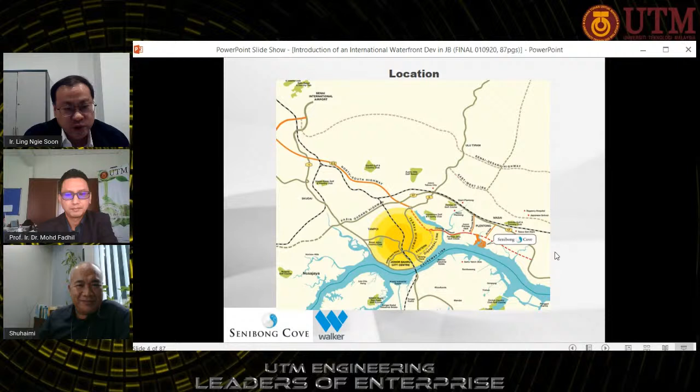So look at this map. As I mentioned, the location is just opposite Sembawang. It's not that far, it's in Johor Bahru. So if our audience has the opportunity, you can always drive here and have a look.

I will show the before and after of this project. We have gone through a lot of hassle, because when we started, the biggest challenge was the water quality. We started in 2008, 2009, when the site consisted of fish ponds, so we carried out infill for all the fish ponds. Reclamation was on the outer part.

We took almost 5 to 6 years to get all the land reclaimed and ready. You can see this project is very unique compared with some developments that are very squarish or rectangular - the piece of land is actually very curved. The land is separated by the river, called Sungai Lunchoo. I think the history actually started from this Sungai Lunchoo.

Because it's a waterfront development, we have carried out a lot of soil investigation. This is one of the trial runs we carried out in order to compact the land properly. So instead of using vertical drains, based on this trial run, we decided to use a surcharge of preloading.

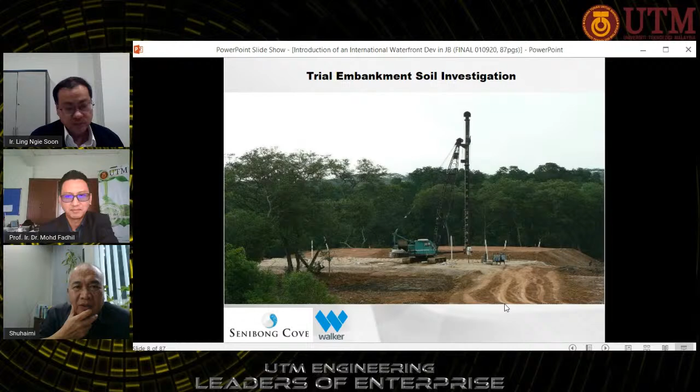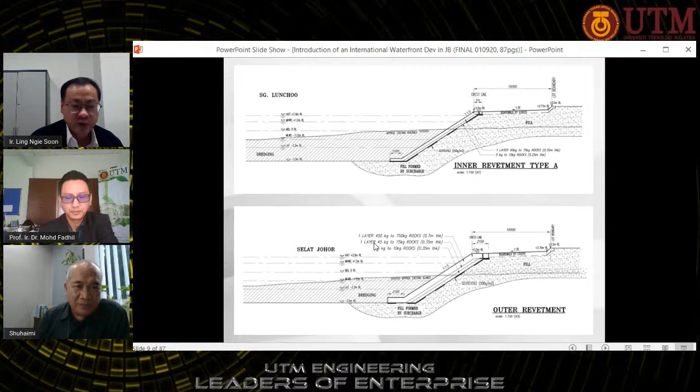Revetment walls have been introduced because it's a waterfront, a coastal line, so you have to protect all the edges of the land. For the inner part, we introduced a 2-layer revetment wall, and facing the Strait of Johor, a 3-layer revetment wall. Next.

Look at this plan. You can see the blue color is a channel we have dredged to -6 meters, 5.5 to 6 meters, and the bigger portion is a marina. That is our marina, so this project is not only normal houses or a park. We have a marina over there. Later we'll show some photos.

Actually, this marina has been fully occupied by local and foreign boats.

The river of Sungai Lunchoo has been dredged also. We have filled up to plus 3.2 meters. So for this island, you can see some of the inside of the island.

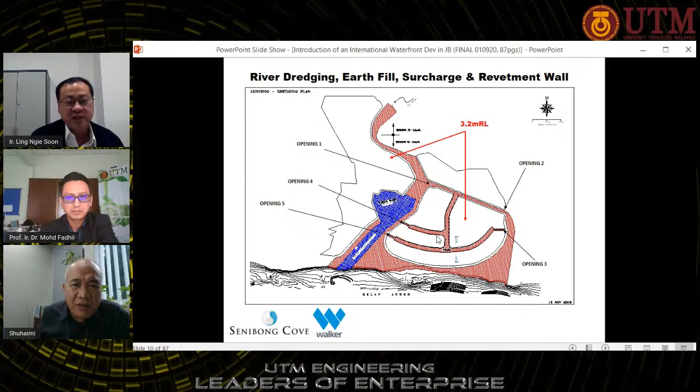We realigned the fish pond, so we made this island. We have a canal inside the island, and based on the water tide, high tide and low tide, the water in the canal is refreshed or recycled every 14 days. Maybe later we can touch a bit more on this aspect. Next.

In terms of all this reclamation, the earthwork, revetment wall, the trial bund for soil compaction, even the canal flushing, all this has been covered in an IEM journal.

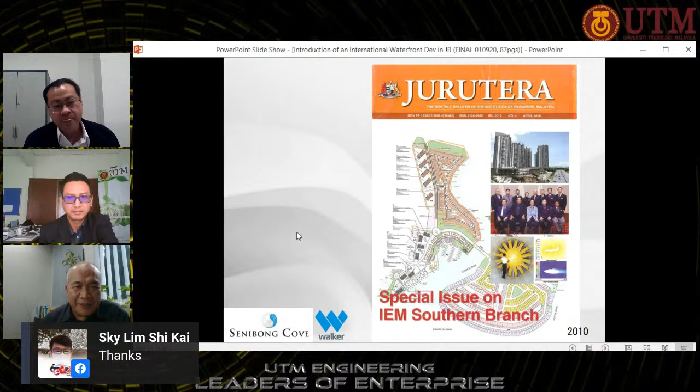Okay, this is back to...

2010 to 2013. During that time, we were lucky because the catchment for this river is not that big, only 7.5 kilometers square, compared with some rivers like Sungai Skudai or Sungai Tebrau which have quarries and factories, so it's a bit difficult to manage. For this river, I think a lot of hard work has been put in.

Next, in order to manage this river, we engaged with the local authority, working with IRDA, DOE, local council MBJB, DID, and most of the authorities, to assist us especially upstream, because we know they have a lot of proposals.

Why not do sub-filtration, this or that? But we know that without minimizing the upstream pollution, downstream filtration alone doesn't solve the problem from the source.

So we worked closely with the local authority, and the engagement with the few factories upstream took quite some time also. The factories had no choice; they had to upgrade their treatment plants. One factory didn't have a proper license, so they had to close down, and all these things. Next.

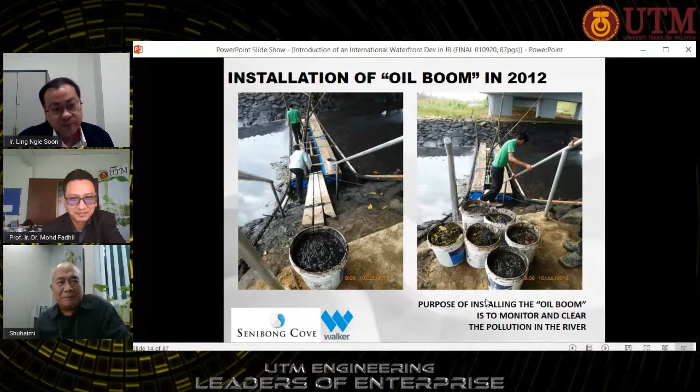We also applied some mud balls upstream. On still water, this actually works quite well, but if you have a current, most of the time it may not work so well.

Yes, this involves microorganisms. This one we worked together with the Orang Asli community, which is not far away from us. This is part of our CSR, our project.

So you're working together with the community of Orang Asli around that area? Yeah, we have 24 families nearby. There's a small river called Sungai Senyum where they are staying.

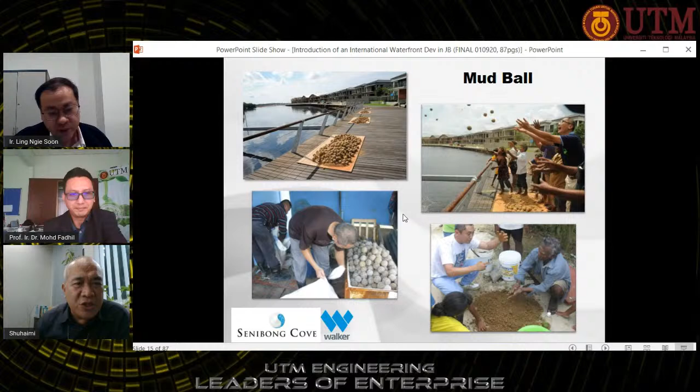We have dredged the river. Normally, civil engineers, reclamation or marine consultants will recommend a cutter suction system to scour the riverbed or seabed. But in this case, we put the excavator on the barge. It's a very traditional way, and we excavate the river very carefully.

Because we know this project needs to be sustainable, we cannot disturb the marine life. If you remove it, you won't see the birds and other fauna and flora.

We have data on the mangrove area for that site before that. Once the project came in, we found that the contamination problem is not from this activity itself, it's actually from industry. So that's why we came in to try to help.

I see, okay. Sorry, please continue with the engineering. I thought I should do the invitation for Professor Fadhil. It's okay, you can continue. Okay, next slide.

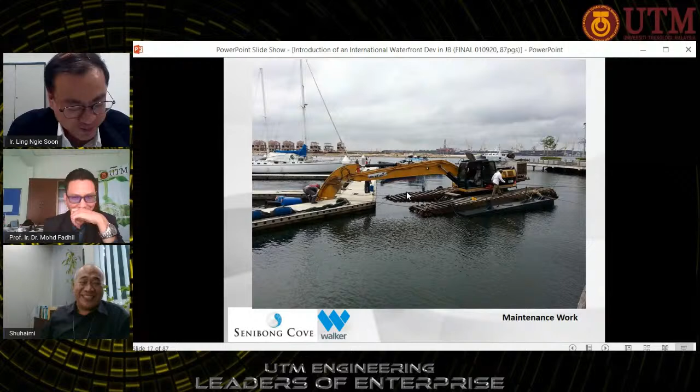Next, we also have a swamp which we have managed to preserve. We liaised with our original landowner, KPRJ, and applied to the government to preserve this swamp because we believe it's important so that all the marine and natural life can be preserved at this location. On one hand we are into the commercial aspect for development, on the other hand we are looking into the environment and nature, which needs to be preserved and sustainable.

Okay, next. I think now it's on the UTM side. As I said, this goes back to 2008 when we started. I think now it's Prof Fadhil's turn. Please, Prof Fadhil.

Thank you very much, Engineer Ling, and thank you Prof Shuhaimi for this very interesting sharing. This is what we call collaboration in reality, because once we started with engineering almost 10 years ago, the engagement began with mutual understanding, particularly on pollution. So when we came to Senibong, that time it was under the Front Concept Sdn Bhd.

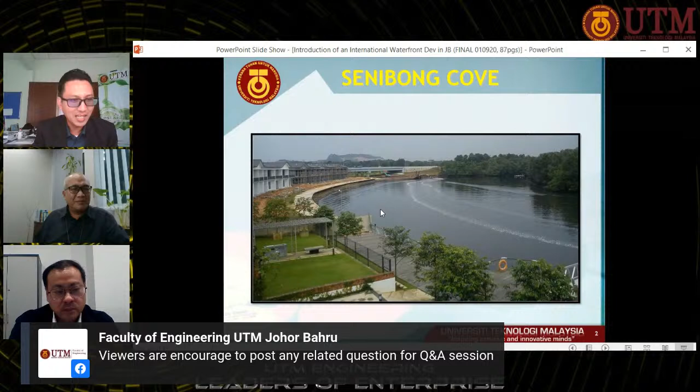So I believe that everybody watching this session will find it interesting to know Mr. Ling is a good partner, a good collaborator. I think his idea, his motivation, is different from other people out there, because other people only think about the ROI, profit, profit, profit. But he's thinking about bringing academics, bringing private entity, bringing the authority to be part of this, because I think he loves the environment. He loved that - I'm not so sure why, maybe Sarawakian, something like that.

Maybe I believe so, because they are more natural on those things. So I do believe that.

Since then we've had some collaborations towards that, and this is our research. As I mentioned earlier, our discussion doesn't only stop at Senibong. Sometimes we move to Ion, which was just constructed and completed at that time. So Mr. Ling asked us, can we have lunch over at Ion? And after Senibong got its own restaurant, he said why don't we have this kind of lunch over there instead.

But over lunch, he always throws out ideas. He always thinks beyond what he originally imagined for Senibong. That's why it became something like a terrible challenge for us, especially as academicians doing brainstorming sessions. Always a brainstorming challenge, right? We actually try to make sure we create some significant impact for others.

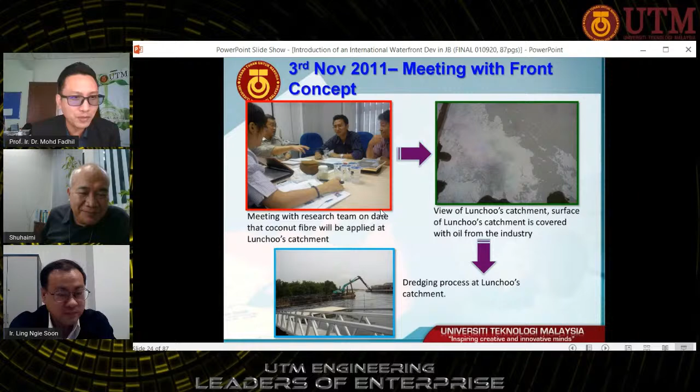Yeah, because we are academicians, we need the data. With the data, then we can try to predict and give some kind of advice for technical purposes. So during that time we tried many kinds of research elements, and Prof Kenzo showed us a very simple method — we did sampling, what we call grab sampling, and tried to investigate exactly what the matters were, the organic matters there.

Even Mr. Ling's team was wondering, because you could see that kind of abundance of oil boom on top, right? But to be honest, the species could still survive there. They said the fish and some other items were still alive, could survive, and they actually received some feedback from the orang asli as well. The orang asli there are the Seletar, orang asal Seletar. During that time they said, 'oh, we don't have any problem,' but that gave us a real headache — how to solve this kind of thing.

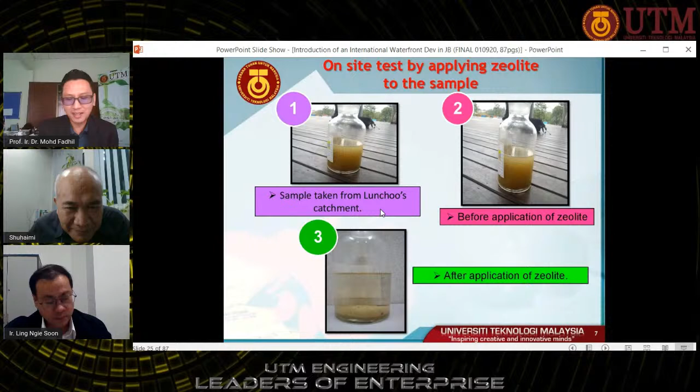Because this is temporary, not a permanent pollution solution, since it's coming from the industry side. So we tried a kind of zeolite potential approach, and it was actually tested. Yes, I can see this is good for this kind of murky material, especially from the water. And we tried to investigate and do further analysis.

Further on, we did some, we call it CSR — not exactly CSR, but volunteer work from us, because Mr. Ling already volunteered many things. He shared with us the data, the facilities, and also the spaces there. And UTM also shared something. So we did some kind of checking on the water quality, and we still found that the water quality was good.

In terms of physical parameters, the DO level, the temperature, the salinity, it was actually natural, or as we call it, the existing condition as before they came for the construction there. And then this made us try to do further investigation, especially on how to clean, because we know that once six months pass, if we cannot remove this kind of oily contamination and those kinds of pollutants...

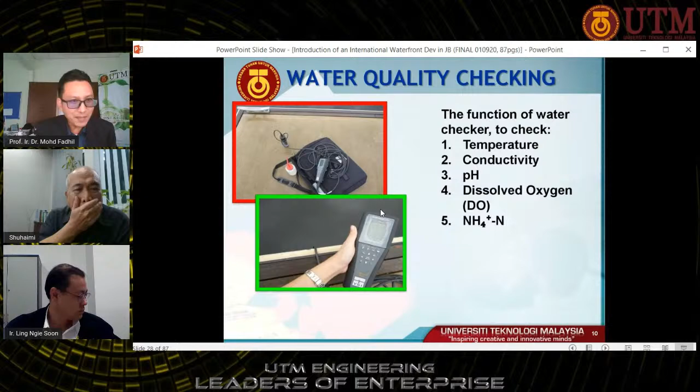Residue from the factory will be in the sediments in the swampy area. The sediment is actually very important for us to study.

That's why we do a kind of laboratory test, investigation, and monitoring for Mr. Ling, and the team of Mr. Ling also asked us what exactly our findings, what exactly our result was over there.

So without funding, we still can do a kind of engagement. Mr. Ling said to me, please Dr. Fadhil, write any kind of cost, we can pay, something like that. He wanted to do that first. But I said to Mr. Ling, this time is not about the cost. This time is about knowledge first.

We are actually very concerned about what happens there because we need to stop the pollution first. I said to Mr. Ling it's unfair for you to pay us because someone else actually did that, it's not from you. So no proposal ever came from me, from my team. I never put a bill to him. I said my contribution is only to the lunch, only lunch.

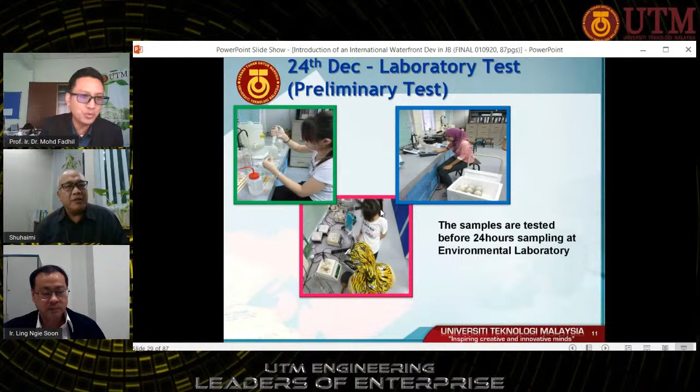So we are doing that thing. I want to motivate people out there, academicians, that cost or money is not everything, because you have to do a kind of genuine research first. Otherwise you may have a very wrong or different view or different research element you introduce to our partner. That's the reason why we are doing that one.

We started with what we call a concept with vulcanized coconut fiber. I think Mr. Ling, you still remember that time. We published 2 papers from these things, and we tried this method at our UTM Skudai River.

At UTM Skudai River we already tested the material, and I think Mr. Ling you still remember my student. She's now working as one of the researchers in a private college there, and she still continues this kind of development.

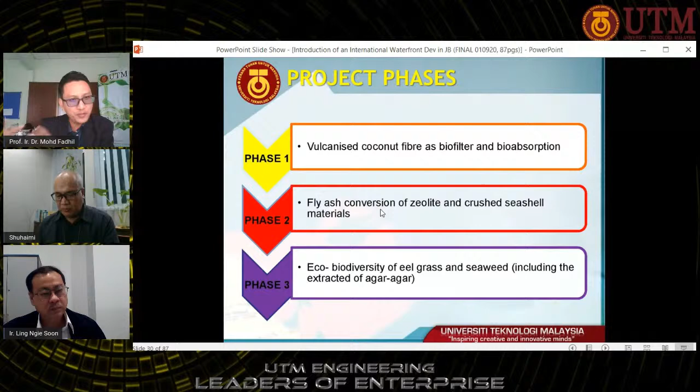So good, what we try to do and promote is not only as a research element but also other value. This is the application and kind of fiber - the first is palm oil fiber, and another one is coconut fiber. We found this is very interesting - coconut fiber is actually the best compared to the palm fiber in terms of absorption.

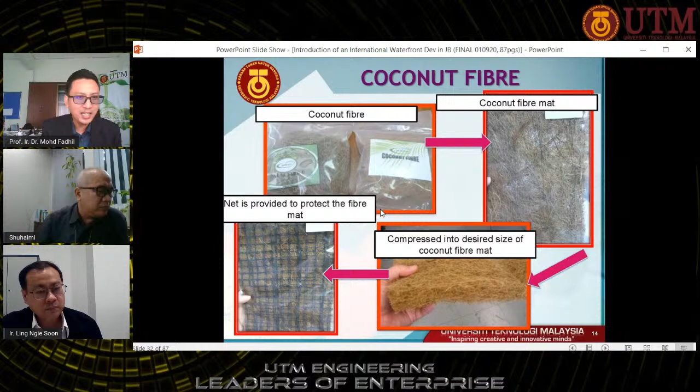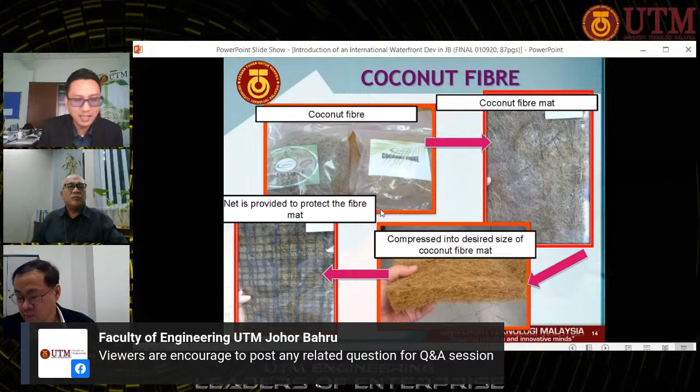We also made another proposal to Mr. Ling: if you want to use this material as your landscape material, because it already absorbs nutrients and pollutants, you can use that as what we call a setback for your landscape. So I think no problem if you want to continue later on with this. We already shared the result with Mr. Ling.

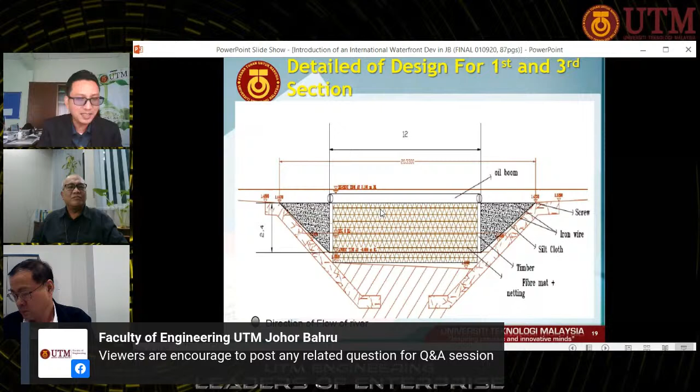Then we discussed further and developed more towards engineering purposes. We are working on some kind of rough idea, focusing on the base design for this kind of fabrication, the specific dimensions, and how many kilograms we need to develop for that.

This is actually to promote to their canal. Because when we listened to Mr. Ling, he said he developed a canal because they want to attract their residents to use that canal back, and also to appreciate the beauty of the canal. So in order to protect the canal, we are introducing this coconut fiber as one of the options if they want it in future. It means we already have some kind of investment for this one, so they can introduce it.

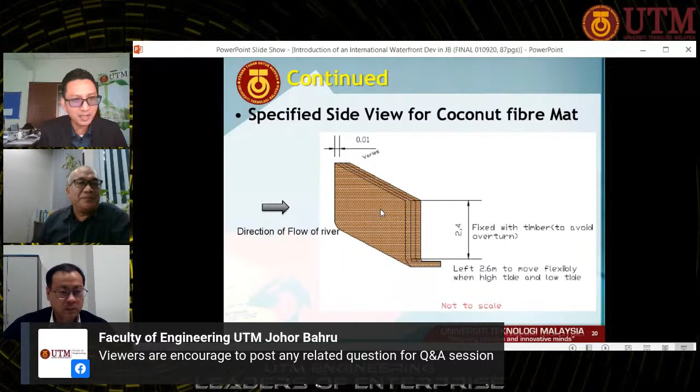But I said to Mr. Ling, please wait until we have treated our pollution well, because the pollution is not coming from you but from someone else, from a factory around.

Prof. Fadhil, just looking at your project, it did require some funding investment to run your experiment. So how do you actually handle that? Because you want things to happen first, but somehow there's a constraint of financial resources.

How do you actually take that as a challenge, and how do you move forward? This slide will be answering your remarks and how we can manage to do this.

Mr. Ling actually felt guilty because he used every single material and information from UTM, but none came from him. But I said no problem, because this is the genuine research we want to develop, and to create trust. I think Mr. Ling believes in long-term partnership rather than short-term, because this is for the future. Everybody can chip in, everybody can contribute to these things.

So for that kind of reason, Prof. Shuhaimi, after we engaged with him, we did a kind of lab testing, and then we had pre-results. So I said to Mr. Ling, can we move to the next phase? The next phase is we are asking for the knowledge transfer project.

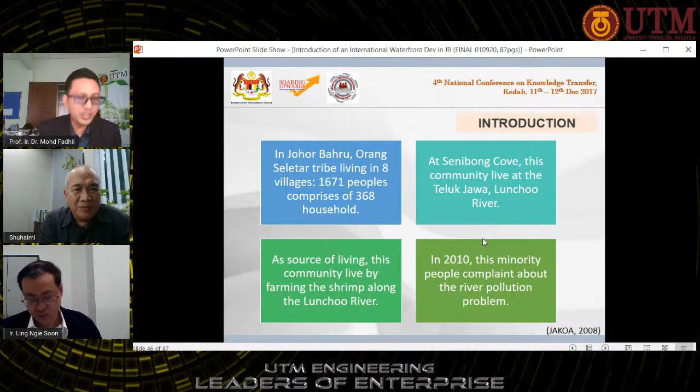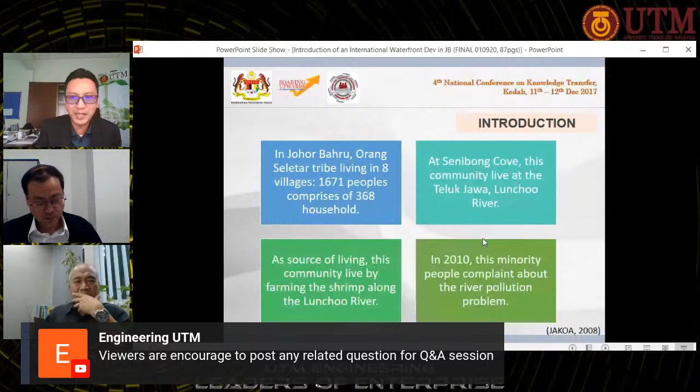What we need to do is protect it from outside influences, from the factory, as well as promote it more. Because of that, we have many kinds of projects, and we also include JAKOA. During that time, JAKOA also noticed this was one of the big projects, and they were very interested to know further about the collaboration, especially with JAKOA. We also have partners - this is part of the partners we already collaborated with.

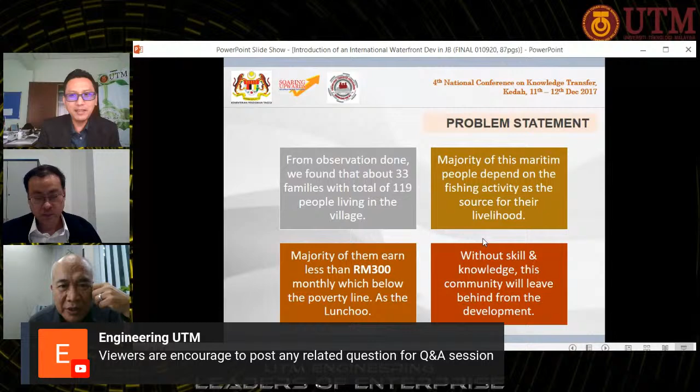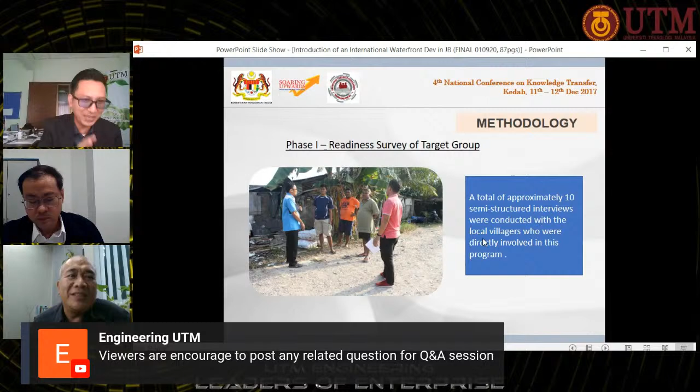I'll just skip all the KTP progress for 2017. This is the survey we did with the Orang Asal Seletar, and they are very happy. I'm not so sure what Mr. Ling did with them, but they are happy - happy that when the construction is there, they can still have some activities there, it doesn't disturb them.

So even the activity may improve their daily life probably, and that's why the main reason they are happy, I think. One reason is because they are doing the dredging side very well, so the sediments no longer interfere with the water contamination.

As our team shared with Mr. Ling, if the sediment is good, everything will be good. This area is very fascinating but also very challenging for us, because the tidal effect is very huge. You cannot discharge everything to the Strait of Johor, because in a few hours it will come back to you. The engineers from Senibong Cove will explain this later because the level is very huge.

I'm very happy this is the first cost from Senibong Cove - they already funded us for this seaweed platform. Mr. Ling asked me what happened to the seaweed. This is one of the reasons we brought a new team on biodiversity, because last time the seaweed was very good value for the fishes and biodiversity there. But when we introduced the system, the seaweed disappeared - it attracted other fishes that ate it. So we wanted to introduce something more resistant that's also good for biodiversity. Senibong contributed funding for this platform, and it still exists today.

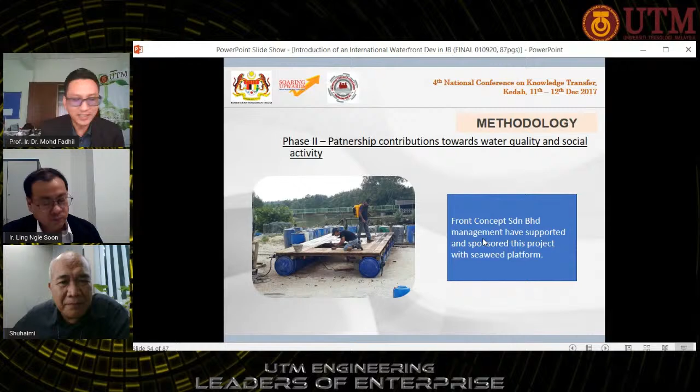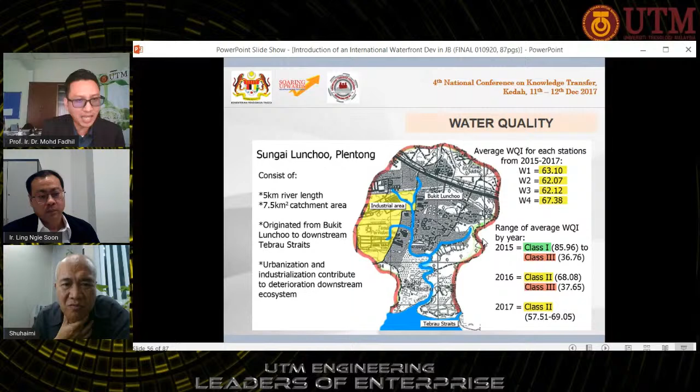Finally, this is the water quality - I'll just skip through it. Actually water quality here is somewhere around class 3, but once the project comes, the factory discharge is class 4 and class 5. So for the future, we're not only thinking class 3 but thinking class 2. This is what we are discussing and how to develop together.

There are some outcomes and impacts, but I don't want to continue - if you have questions, you can ask. What about fisheries? Is there any improvement or increase in fisheries activities? Yes, that's what we're thinking for future planning, so fisheries studies must be done.

We are very lucky because we have colleagues from FBME in UTM who are willing to contribute and introduce biodiversity as well as help keep the water clean. Mr. Ling is very happy - he said every time we come to Senibong, we introduce new things. Now it's about the new generation, young and very motivated, so they want to do something else.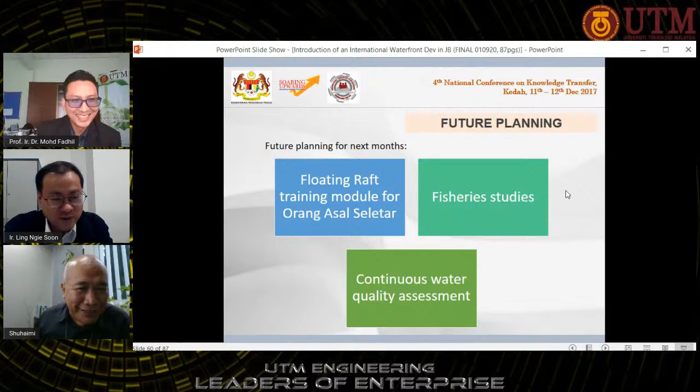The reason I asked this is because we did a dry run of this last month. During that presentation, the engineer showed us a photo of a person catching a fish from behind their house. I can share the photo later - yeah, that's our resident, a good one of our residents.

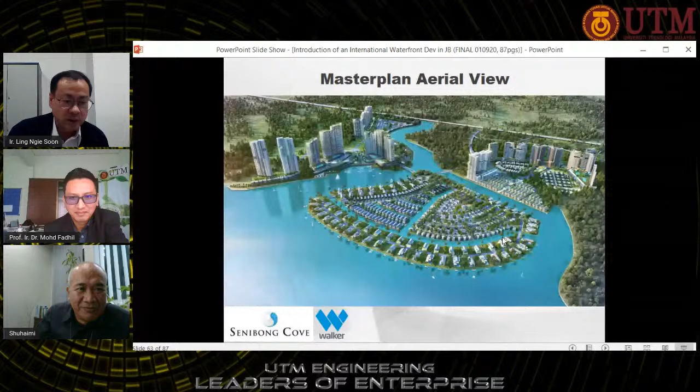If those haven't been to Senibong Cove, maybe I'll do some introduction. This is our main entrance. So when you enter, you see this is what we call the green boulevard. Beside the water, we have planted a lot of trees, especially rain trees, as a canopy.

This is the park next to when you enter Senibong, next to the highway. Normally for a lot of developers, they will fully make use of this pocket of land. It's quite big, around 5 acres. It's fronted to the highway of the main road. If you're from KL, you'll see they would make it a mixed development - shopping mall, hotel, office tower. But actually, we make it a park. So we don't look into the ROI on this aspect.

The park actually introduces a water pond. This water inside the pond is from the river. So high tide water flows in, and we also introduce an aerator. We use that pond also for water quality monitoring, so we take samples from there.

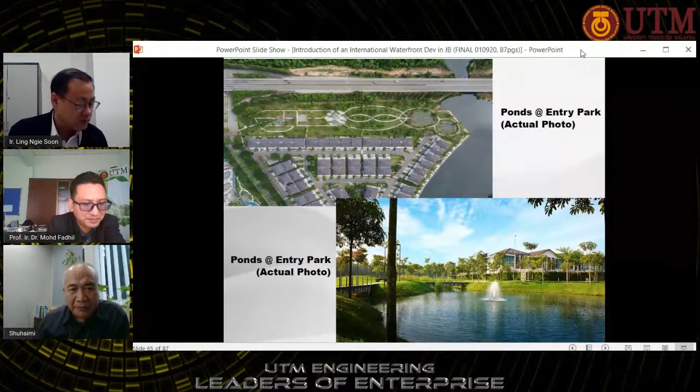There is another park I think is quite unique, which I want to share. Originally, this park had one main drain cutting through it. Normally for houses facing the main drain, a lot of buyers try to avoid houses facing the main drain.

But when you have a crisis, there is always an opportunity. So this main drain, we connected it with the park. We introduced a pond, so it became a water feature. When the high water flows in, we introduce a weir, that is how we retain the water. So the houses, instead of facing the main drain, actually become alive.

Mr. Ling, this is the original photo, right? This is the original photo. I think on the top is our original planning.

Yeah, next. Engineer, do you plan to show some video, things like that? Because I think we're almost about... okay, maybe just finish off the slide. Yeah, I think not that many.

Okay, this is the marina, and then the marina temporarily has a restaurant, seafood restaurant over there. So Professor Suhaimi, when you're here, we can buy you seafood here. But the seafood is not from the Sungai Lunchu, no worry.

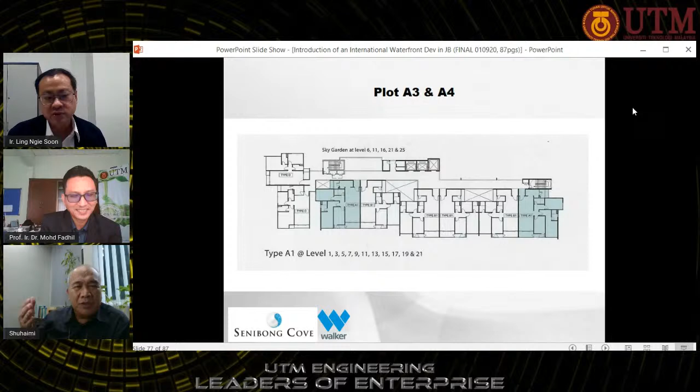You see, this is the apartment layout design. There is single loading, a lot of cross ventilation and lighting. So there's not only the water, swamp, green, all these things, but also lighting - the ESD side.

There are a few more slides. I think this is some of our latest projects. This is Senibong Hills, which is quite unique - I think this could probably be the first in Johor. Instead of putting the park next to the house, we put a park inside the house, creating a void which you can turn into an inner park. You can have your own privacy and also have activities inside the park.

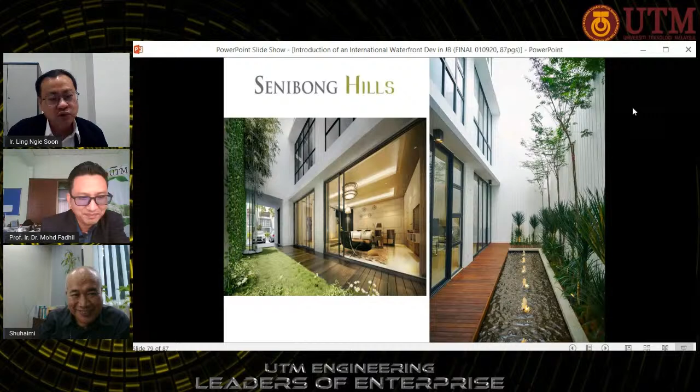We engaged Mr. Ling with our expert from UTM, especially on inner parks and how to create urban development for this. So, not only the external park or garden, but we bring the garden inside the house. This is something I think on the engineering and architecture side which is quite a good experience. In terms of having a good product and good hardware, you also need good management - property management and community management are very important for the long term.

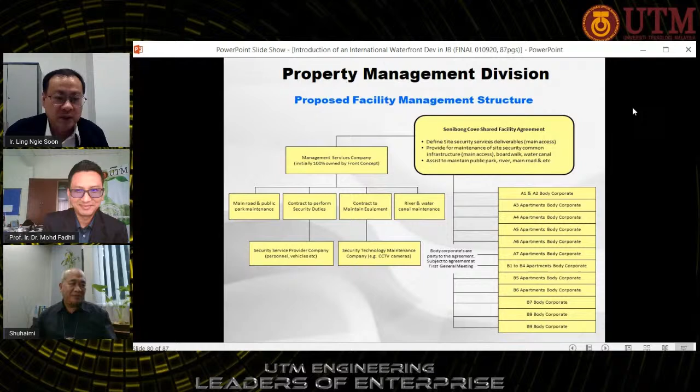Next, nice - just a few more slides. Because of the water, we had to encourage water sport activities.

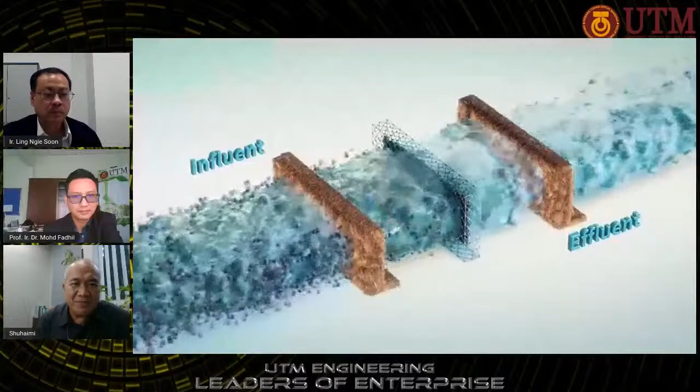Professors from UTM and Japan's Nagoya Institute of Technology continue to tackle pollution through continuous river rehabilitation. Water from the mangrove is channeled to ponds so that its quality can be constantly monitored. Vulcanized coconut biofilters are used to protect and sustain the ecosystem. Crushed seashells and zeolites are used to filter water and waste. Seaweed and eelgrass help sustain the ecosystem by filtering pollutants and increasing productivity of plants. Senibong Cove continues its effort to improve the surroundings of Lunchu River, ensuring a clean and healthy lifestyle.